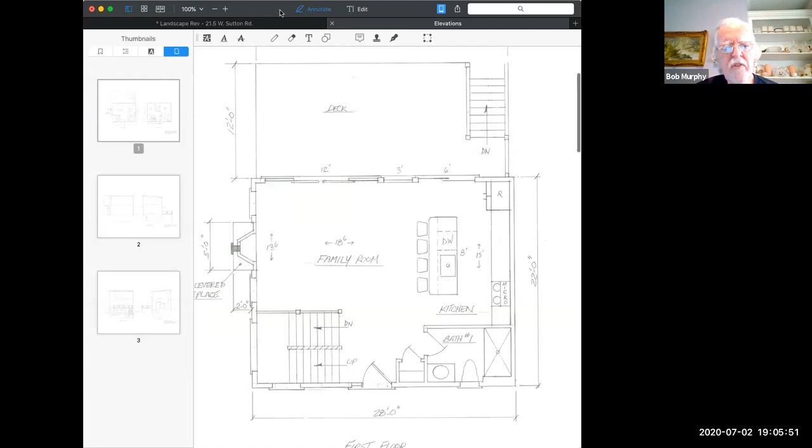Okay, if you're ready. At the last public hearing or meeting that we had, there was some additional information requested, which I submitted. I had the architect draft elevation views of the building, and sent them to me as a PDF, so I believe you received copies of that. Also, I revised the landscaping plan to show the topography. Okay, this is the building elevations here. That looks like a floor plan. Sheet 2, I believe, is east and west, although they're light on the screen, but they're there. I believe sheets 2 and 3 show the 4 sides of the building.

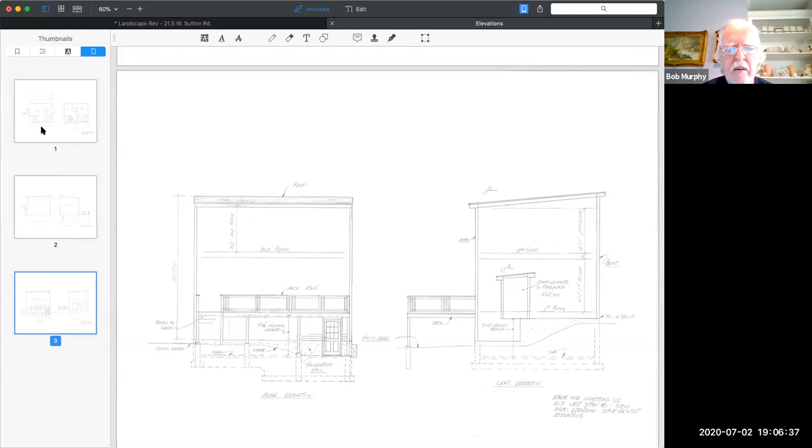Basically, what we've done is reduce the elevation of the building by lowering the floor the way we discussed at the previous meeting. What we did do was regrade the landscaping plan. I don't know if you have a copy of the landscaping plan, but that really tells a story. What we did on the retaining wall on the north side, abutting the property by Engstrand, we took a complete series of blocks off the top of the wall, and what we did was look at the elevations of the septic system. We lowered the grades significantly near the house.

That allowed us to not need to put in a stairway. If you look at the grading just north of the septic tank, you'll see that we cut the grading down, so there's actually a high point over the septic system, and then it drops down toward the building. What that does is allow you to have a regular doorway coming out, but you don't have to have steps. You will have to walk up a slope, but it'll be a grass slope instead of steps. That was one change. Another note we added is to have English ivy growing on both sides of the wall on the north and south side, and also along the southern side where the wall abuts Grange, number 23. We added roses there because it's the southern side, you'd have more light. The idea was to reduce the impact of the wall by covering it with vegetation.

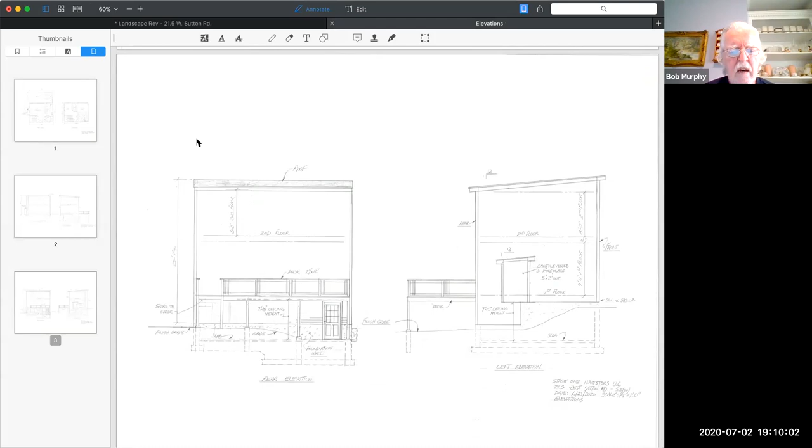That takes 3 feet off the height of the building right there. So the height of the building has been reduced by a minimum of 3 feet. And again, it's a fairly flat roof. But I asked the architect to do whatever he could to reduce the impact, the visual impact from the street relative to the height of the house.

Those are the major changes. One other point that I made on the retaining wall design - we added an optional post and rail fence on the wall. And the reason I say optional is because I thought if we left it up to the building inspector to follow what the code required - my understanding is that where the wall does not abut a walkway or a driveway, it's just basically a wall passing through the yard. It may not require a full height fence.

But that's, again, I would leave that up to the interpretation of the building inspector as to what is required, from the height of the wall.

We also found that by landscaping on the front of the walls, we were going to be adding mulch and loam. We've got 3.5 feet on the north side between the wall and the property line, and we could easily add 1 foot of loam along the entire length of the wall. That would knock off the wall from, say, 2 feet to 1 foot. I believe at the highest point it was 5 feet - the visible wall would be 4 feet. So through landscaping and grading and with plants, we have significantly reduced the visual impact of the wall from the north and the south.

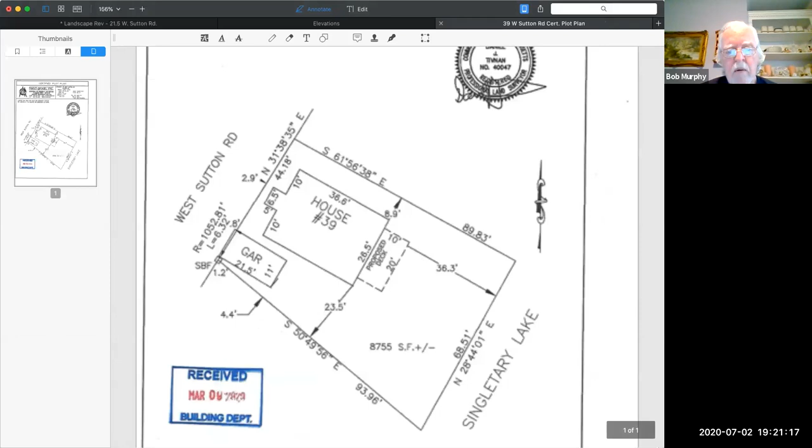But if the plan you just showed wasn't the site plan, I'm not sure where I saw that. I'm just looking back at what we've got here. Did I just miss it in the past? What was that old one that had it on there? Yeah, that was a preliminary plan from a while ago. I was going to say, okay.

It's really up to the board how you approach the deck. I was more concerned with the square footage of the building, and possibly a patio type situation. But if there's a deck, I'd like to leave it up to the building inspector, zoning officer, as to how the deck would go, if that's okay with you.

We have to vote on what's submitted, so you're submitting it with a deck now. Is that okay? I consider that a pretty substantial change. I as well.

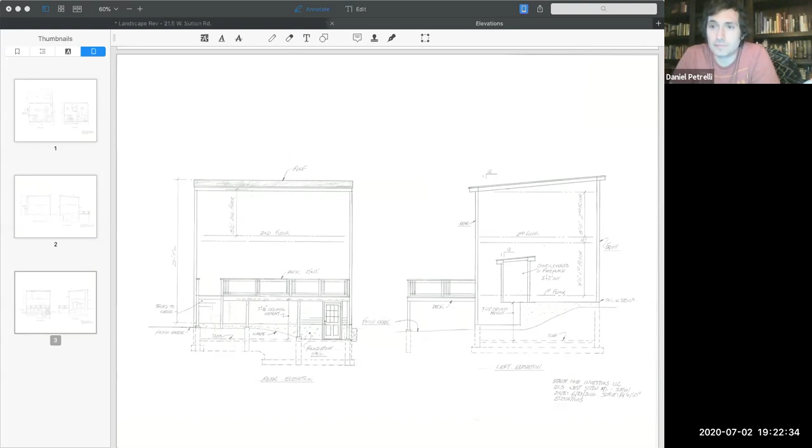Dan, any other questions? Nope. Bob, I have a question for you. Sure.

I think on the earlier proposal, we were talking about a full basement with a bulkhead for access. Now, all of a sudden, we've got a walkout. And when I look at your sill elevations and finished floor elevations, it looks like everything's come up 3 feet, which is pretty much the opposite way we were trying to go with the house.

Well, that's the lower ground elevation. The ground is up 3 feet and you have windows. There's no walkout door, no typical walkout slider doors, that type of thing. This is just a doorway where we graded by lowering the wall one block in height. We graded that area, lowered the wall, and found that we wouldn't need a bulkhead if we just had grading going down to that doorway.

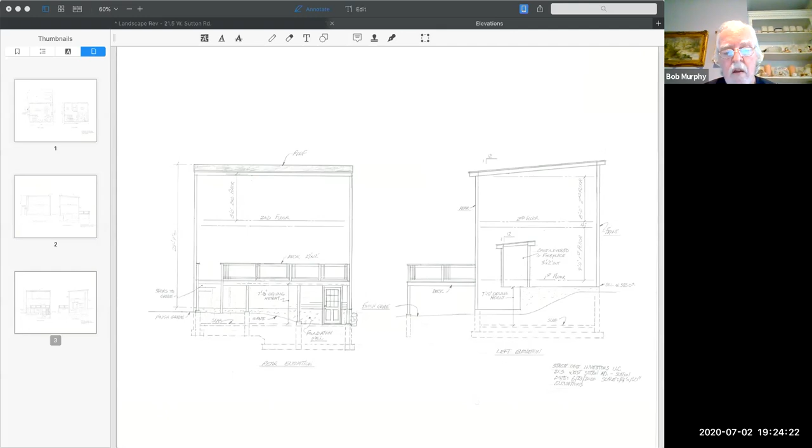It works either way. Believe it or not, if I put in a bulkhead there, which would give me the same height as a door, I'd have to raise the wall up another block's height, because the bulkhead now requires me to fill on either side of it. This way, I take the bulkhead out and use landscaping, a grass slope, to achieve the same thing without steps. But what it did do is allow me to lower the wall a full block's height in that area.

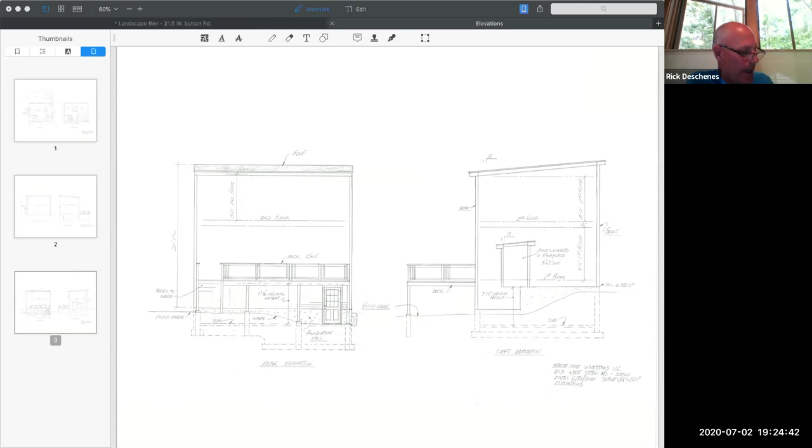But the elevations, Bob, on the plan you provided, you're calling out for a sill elevation now of 583. On the last plan, it calls out for a sill elevation of 580 and a slab elevation of 572.5. So now your sill elevation's at 583, and with quick math using a 7-10 ceiling height in the basement, your basement's at 575.16, give or take. So everything's gone up 3 feet.

Where are you seeing the change in sill elevation? It's right there on that drawing on the screen. Sill elevation is 583.

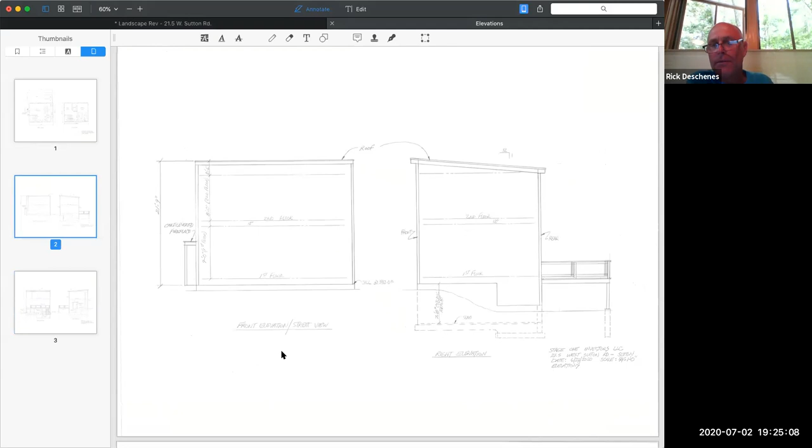Can you show me the landscape plan, the topo plan? Because I didn't catch that. That's the sill, 580, that's the sill. I believe that's an error on the architectural plan. That's an error, because the sill is set. If you look at all the grading on the site, the sill is set at 580. It's absolutely not supposed to be 583.

I missed that on the architectural plan. In fact, I have a copy of the plans here, but what you're seeing on the site plan, that sill elevation of 580, that's the elevation I'm asking for. That should not be changed. It may be a way that the architect is interpreting it or something, but if you look at the slab elevation and the sill elevation, the sill has not changed. Okay.

Do we have any other questions or comments from the board? All right, at this time, is there anyone who would like to comment on this petition?

Chris, did anyone call in on the phone or anything like that? No one's in the chat. I think Christine... unmuted herself. So close. Oh, sorry. I don't know, it's just like it sounds. Okay, thank you.

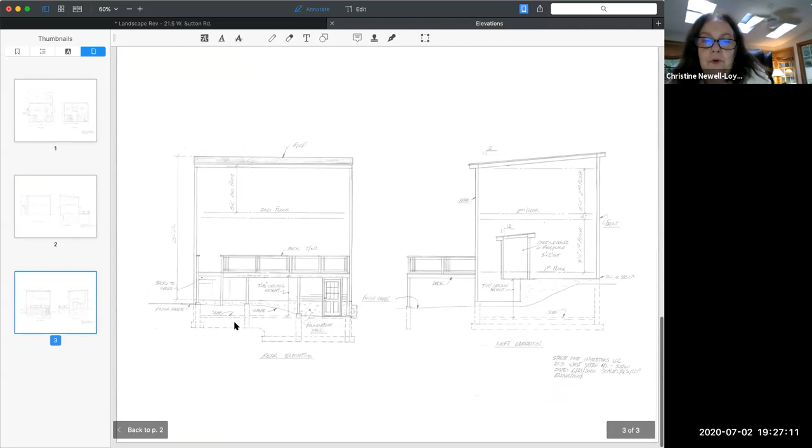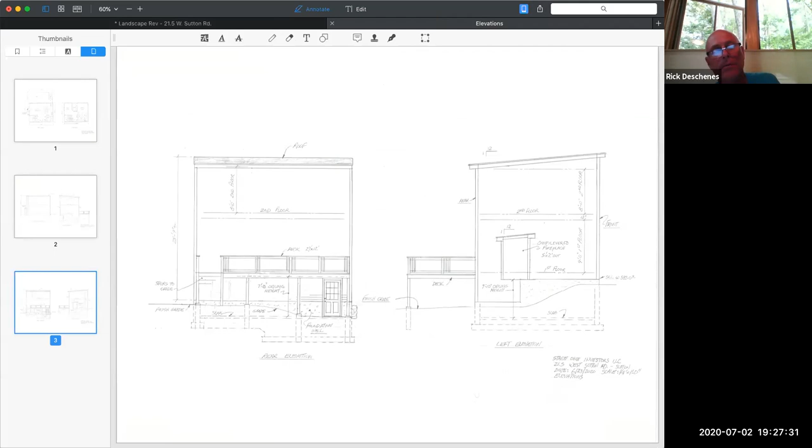So the other thing is, on that other drawing, the ceiling heights in the basement are now 7 feet 10 inches. Last time I thought we were talking about 5 feet. So I'm confused. No, that's because we had gone back to a full basement on the last drawing. He was dropping the floor into the ground, not raising it up. He was going deeper so he could have a full basement. Somehow I missed that. Okay.

The reason for that was so they can make a room. All the tradesmen working in the building doing the electric, the plumbing, the heating and all that, they're not going to want to work in a 5 foot area. And how long are they going to be there doing work? They're going to be there for the building of it, and then you make it sound like people are going to be in there all the time doing work.

I don't know, whatever. So the floor was lowered, but the building was not raised. The floor was lowered because we found that the groundwater and the soil material allowed us to lower the floor. The floor level was lowered. And again, it's not meant to be a living area. You could put that in your conditions of approval. It is absolutely not meant to be a living area. Right, but that doesn't mean... but whatever.

So the other thing is, one thing I keep hearing is that now you've got two different plans with different elevations. And if you guys are approving something, that's concerning to me in terms of it's all up to interpretation. So what is it exactly you're approving? The architectural design of the house, that's what somebody's going to be building from. They're not going to be building from a landscape design.

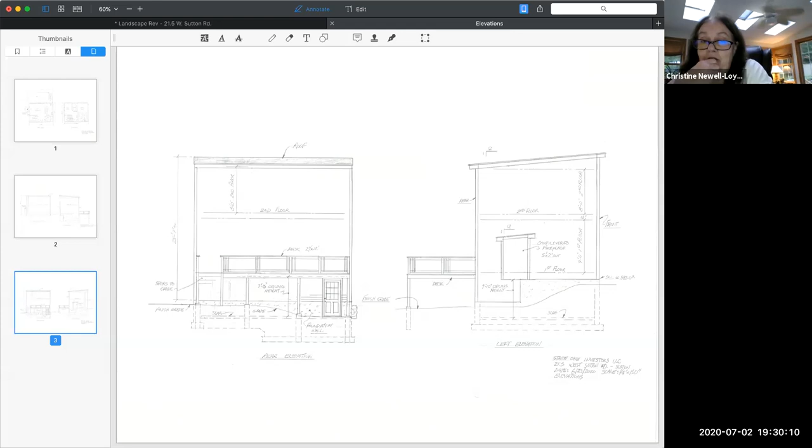I'm really happy the roof is lower, for me that's a nice perspective, but imagine standing, again, that 5 feet plus 4 feet, stand on somebody's shoulders and you got that running all the way down the length of your property that you've owned for how many generations and years. I don't know, that's it. I'm done, Christine, you know how we all feel.

Christine, yeah, when we do vote on it, if we approve it or not, we will be pretty thorough in exactly what gets approved and what doesn't. I know it sounds a little sketchy as he's proposed it right now, but anytime we approve anything, we have to reference plans and that type of thing. So it will be much clearer when and if it gets approved. Okay, thank you, thank you.

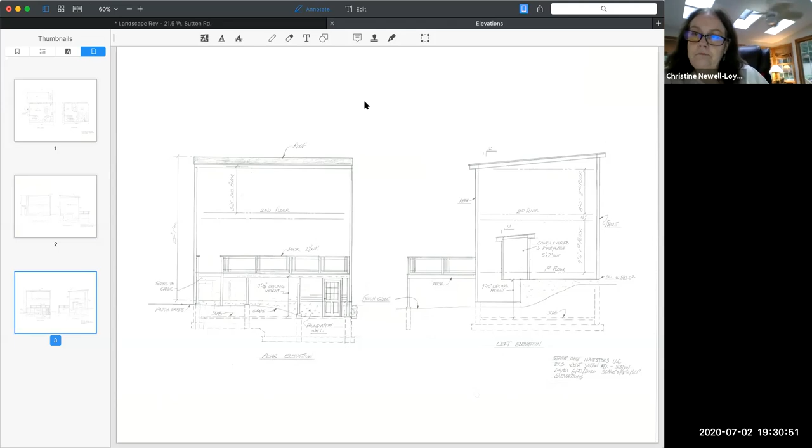If I could add a few more notes... I don't know how to get on. Yeah, he's having notes. You're on, Ronnie. I'm on, I'm sorry, Chris, what? Can hear you. Hello? Hello, we can hear you. Who's this? Oh, okay, my name is Ronnie Angstrand. I won't take much of your time. It's Alan and Ronnie Angstrand, my husband is alongside.

With Patricia Grandy, who has given me permission to use her name, we want to be on record as protesting this whole development of the property for all the reasons that you're presenting yourself. Our biggest concerns are those walls and the water that flows through here. We do not know that the wall is going to maintain that water that flows, and we know that for a fact. And our wells are so close, is that going to affect the water from our well to his well?

These are just questions still. And about all the trees—does he have to cut down all those trees? If you ever read the article they just posted in the Uxbridge News about all the trees and how good they are, what they do for us—they give us oxygen, they help when we're in drought. There's so many avenues, but our main concern is we want to just protest this whole development.

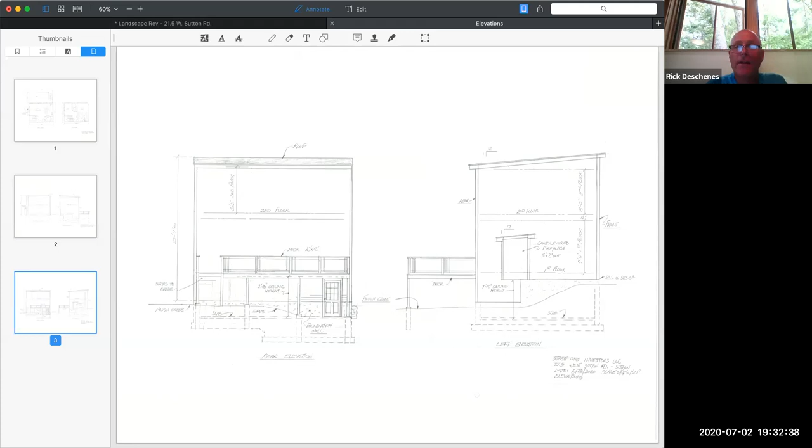Bob, did you have a couple things you wanted to add? Well, one note was just brought up—the abutters keep talking about flowing water on the site. I've been visiting this site for the last 3 years with the Board of Health agent, Conservation Commission agent, the owners, potential contractors, the tree people, and not once have we seen evidence of water flow on this property. It's like the eagles—they had the Division of Fish and Wildlife down there because there were supposedly eagles nesting in the trees. Someone is providing these people with information to use that's just not true.

But as far as what I'm asking you to approve, the plans that were approved by the Board of Health and the Conservation Commission have the grading and sill elevations—the walls have been revised at the request of the board, and we've done that. As far as elevations of the sill and things like that, those are on the plans I've submitted to you. There should be no ambiguity.

As far as what I'm asking you to approve—but Bob, you're redirecting the water. I don't think you can hear me. What water? The water that's going to come down in the spring is going to be all redirected now with all the removal of these trees. I made a point of going to the site this spring to find the water.

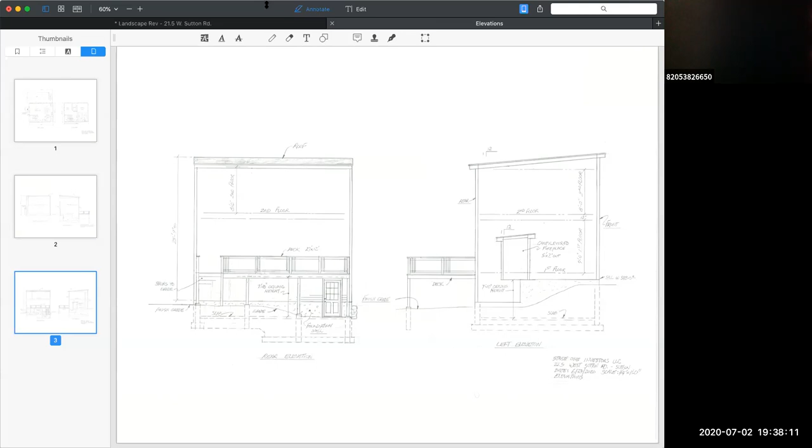That vine, that ivy, is a bad idea because we see it here. It grows into the lawns. I have it on my house, and I clip it along the ground. It's on a stone wall, and it goes up the wall. Every now and then you prune it. It's not that hard, but I don't want to do that. I've got all the vegetation here I want.

I don't want to keep this meeting going. I just wanted to voice that we do object to all this development. Thank you.

Is there anyone else who would like to comment on this petition? All right, any other comments from the board? I've got a puppy.

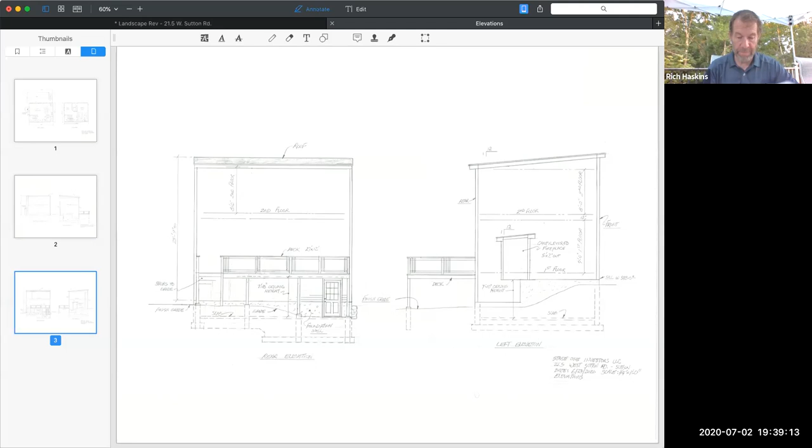Rich, you all set? I saw some photos of some walls around the lake, and there are a lot of walls, retaining walls, septic walls, walls with fences above them. Somebody did a pretty good job taking photographs to share with us. Did everybody see those, or was it just me? I actually was out on the lake and observed the walls as well. It's not an unusual occurrence on Singletary to see houses with those types of walls.

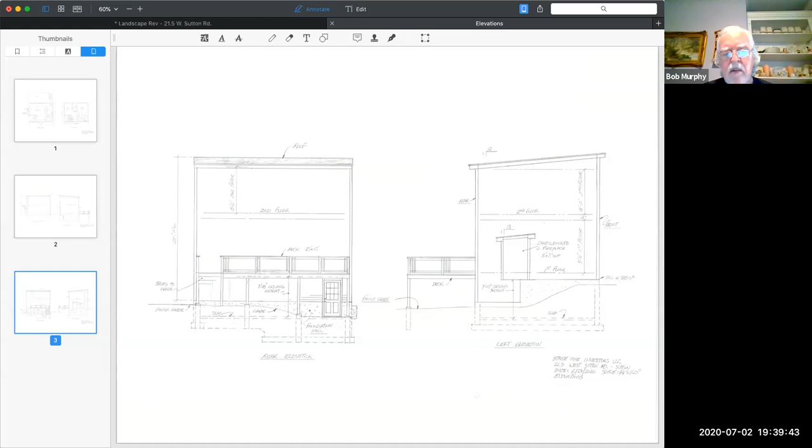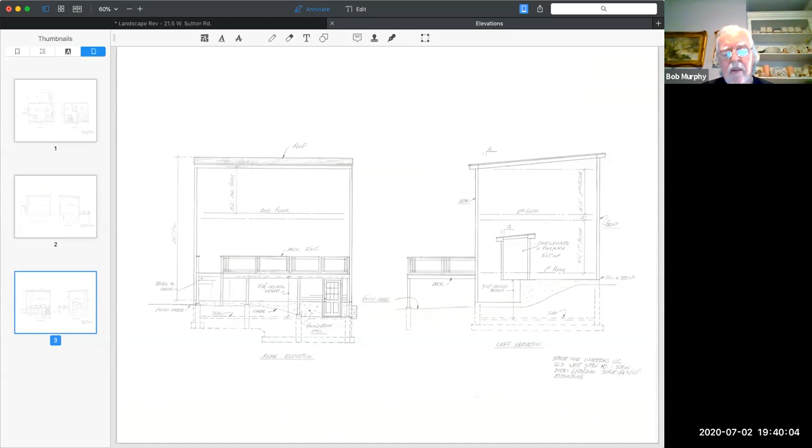I guess my only concern is the discrepancy in the elevations that Rick mentioned. The elevations on the site plans are the ones that we're using. These plans are the architect's. I didn't see all the elevations on it, but I saw the house itself, and the floor level is based upon the grade of the sill, and the sill is set by the septic system plan. I can't go raising it or lowering it. So for my special permit decision worksheet, I need to reference the site plan and architectural plan. I don't know if we've ever encountered a situation where they don't match when it comes time to go to a vote.

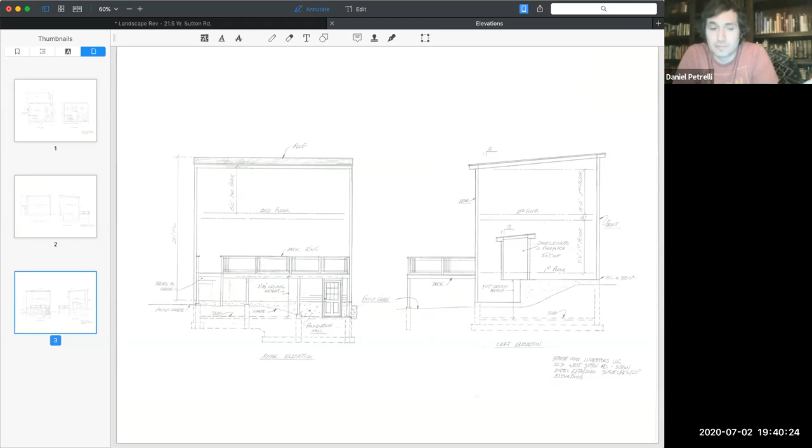Well, I'm looking at just last month, Dan. Yeah, going through my plans right now. I want to see this sill.

If I could add something on fencing, we got a little clarification from John. The fencing is really only required if there's a walk, path, parking lot, or driveway on the high side that's located closer than 2 feet. So in this case, I don't believe a fence would be required on top of that wall.

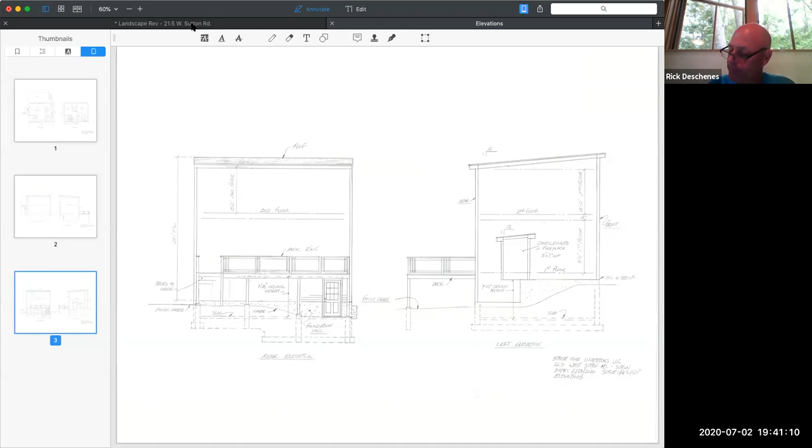I didn't know if the board wanted to discuss the deck at all. Can we go back to the pictures for a second? Which one you want to see? I just want to go through them - are all of these pictures of properties in Sutton?

No, there's some Millbury pictures here, some of both. And the blue house - about 5 of the pictures are of the same house, that big blue house that's got all the walls and retaining walls on it. Picket fence, walls - is that what you're talking about? So there's a big blue 2-story house shown with a boat in front of it in one picture, a fence on a wall in another. That's all one house, I think that's in Millbury. Okay.

And these pictures don't show the retaining walls' proximity to property lines or abutting houses either. You can't really see how they impact what's around them. So we've got a bunch of pictures of houses in Millbury with retaining walls. Well, some of them are in Sutton, to be fair, they're not all in Millbury. But which ones are the Sutton ones? Yeah, that's a good question. It's not marked on there.

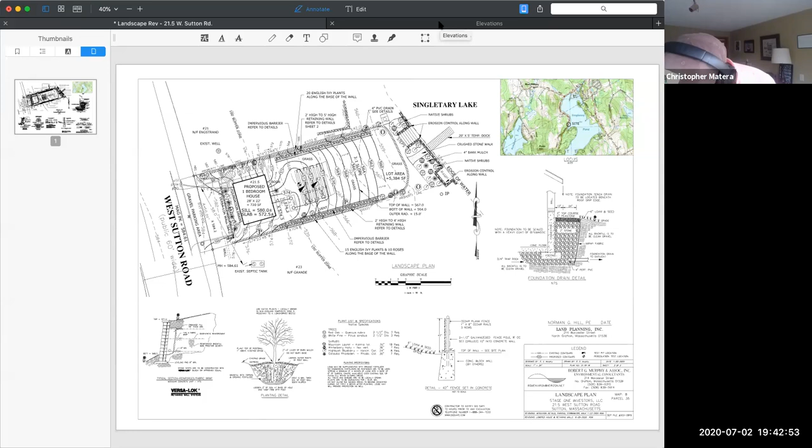I can't guide you through them because we don't have them. I went on GIS and Google Earth and looked around, but it's kind of tough to get the perspective of height from above. I saw a lot of bulkheading, retaining walls used to retain soil around the perimeter, and a fair amount of retaining walls used to rack dirt around the proximity of houses and foundations. But I didn't really see anything on property lines that ran the length of property lines.

I didn't see, and like I said, using GIS and Google Earth it's tough to get a perspective of height, but I didn't see a similar condition as existed on the lake in terms of proximity to property lines, height of wall, and length of wall running along property lines.

There's no question this will affect the neighbors, and they'll certainly see it. I guess is it unusual for the lake? My answer is no.

I would also question how many of those walls actually have a building permit. I see walls all around that lake, and I guarantee the majority of them were just built without permits. My client is trying to do everything above board here, be open to the process. You should be aware that if you go down to the building department, you won't find too many applications for retaining walls down there.

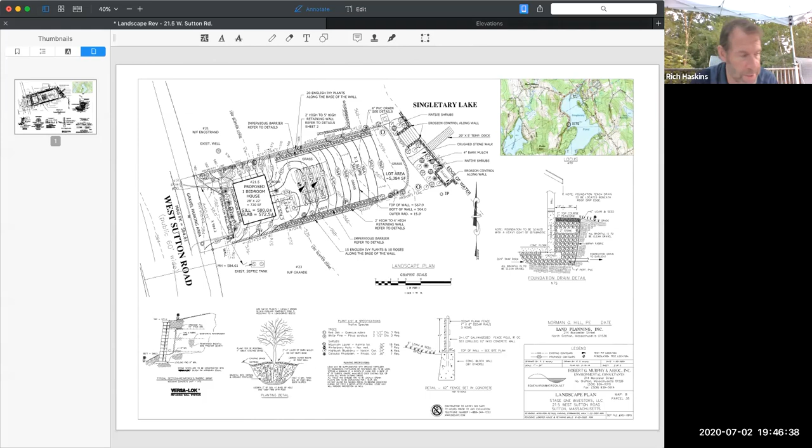That's a good suggestion, but I think we historically approve what's before us and not conditioned on future plans. Yeah, I agree, I think we'd have to probably get in front of us what we plan to approve.

I think we should just vote on it. I'm tired of going around beating the same dead horse over and over again. I think it's time to close.

I agree you could vote, but I've been before many boards in many different towns, and I've had numerous decisions with conditions. You can condition the approval that, for instance, the sill be no higher than 580 - it doesn't matter what the architectural plan shows.

The architectural plan gives you a view of what the side of the house will look like, but the sill elevation is based upon the Board of Health plan. That's the primary plan. The secondary plan is conservation, the landscape plan, things like that.

But what happens if we do that and the sill is higher? What is the recourse? I mean, the horse is out of the gate at that point.

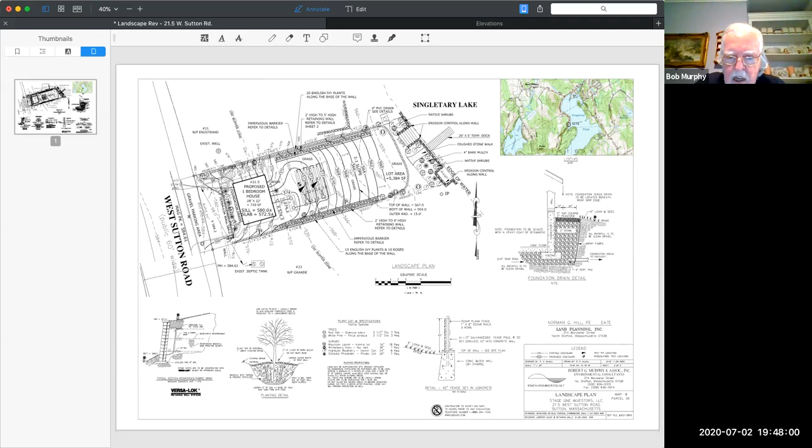They tear it down. Here's the way it works: the building inspector requires a certified foundation plan, and that plan has to show that we meet the setback requirements from the property lines. The building has to be the size it is on the plan, and the sill has to be the elevation that's on the plan. That's required before we can do any building on the property.

Well, we first drill the well and get a water quality certification on the well.

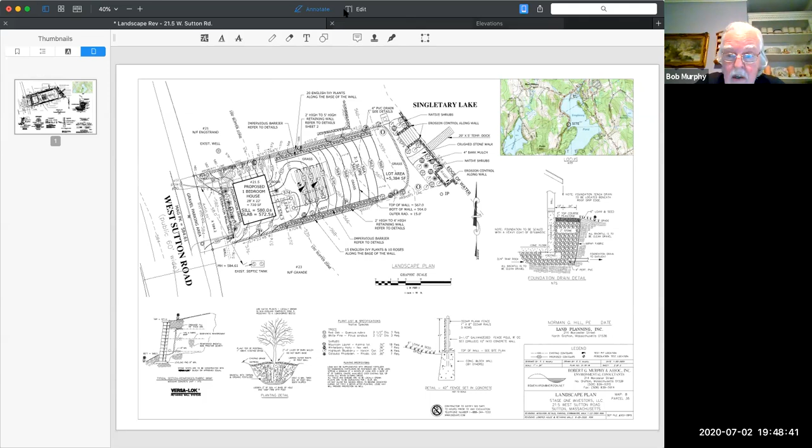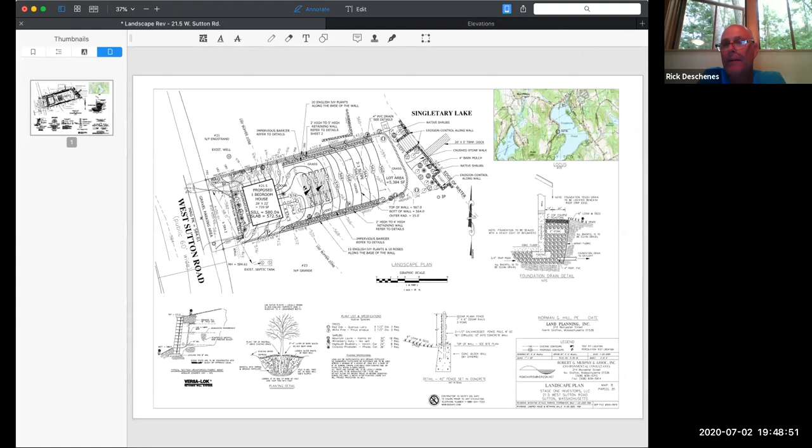Then we get a certification on the location of the foundation. You can't build a house until the foundation is certified. That certification shows the setbacks of the house, the size of the foundation, and in this case, it would also show the sill elevation. If it's on the plan, that's what it has to be. It's part of our requirement anyways, on the approval. It's a certified plot plan, and it's got to be certified that it is what it is, or they'll be taking it down.

Believe me, I've seen them come down. I just did one in Oxford - they had to move, they had to take the house out. We have a registered surveyor locate the house and the sill and all that before we proceed any further with construction.

I'd just feel better if we had a better set of plans. I know we've been going round and round, but what does the board feel as far as moving forward? Do we try to close this, vote on it, condition it to some revised plans? Do we call out the sill elevation? And what do we do about the deck?

Bob, do you want to leave the deck on? Do we want to take it off? It seems to be an oversight that there wasn't a deck there from the very beginning. I was not asked to show a deck, and I didn't. Apparently the architect may have received some direction in that, but I was not aware of that.

My concern here is that any of the requirements relative to a deck or fencing and things like that, I would be willing to follow the requirements of this board and the zoning officer, the building inspector. See what he says if it's allowed - he knows more about it than I do.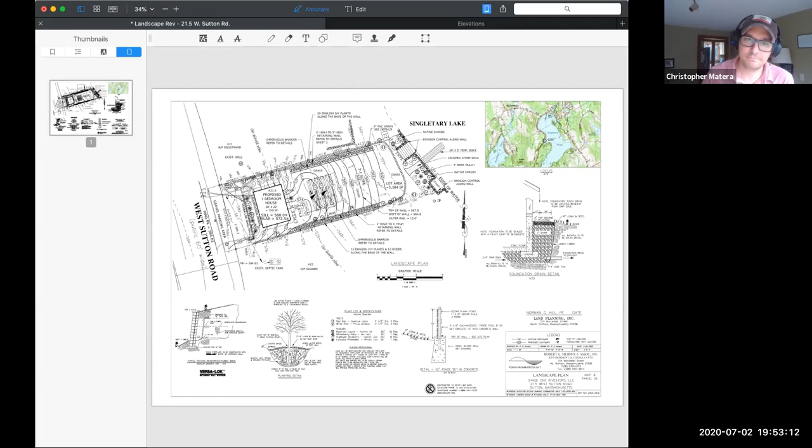Mr. Chairman, I'd like to make a motion to close the public hearing. You got a second on that? I'll second. All those in favor? Rich? Aye. Dan? Aye. Jim? Aye. And I'm an aye also. The ayes have it. We'll close the hearing.

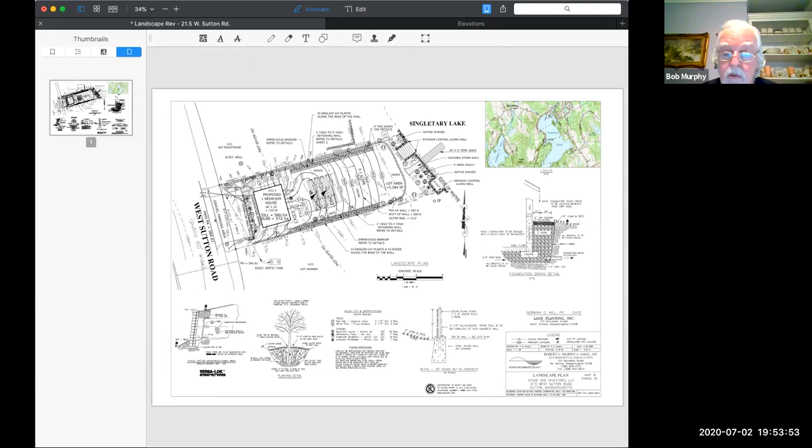To all interested inhabitants of the town of Sutton, in accordance with the provisions of Mass General Law, Chapter 40A, Section 11, the Zoning Board of Appeals will hold a public hearing at the Sutton Town Hall on July 2nd, 2020 at 7:05 PM on the petition of Mark Romano and Karen Carlson. The petitioners request a special permit, Section 7A2, as it pertains to Section 1C2D of the town zoning bylaws to permit the replacement of an existing garage with a 28 by 48 garage with living space above. The property that is the subject of this petition is located at 165 Boston Road, as shown on Assessor's Map number 10 as parcel number 62. The property is located in the R1 Residential Zoning District. A copy of the petition may be inspected during normal office hours in the town clerk's office located in the town hall. Any person interested or wishing to be heard on the special permit petition should appear at the time and place designated. Daniel Petrelli, Board of Appeals Clerk.